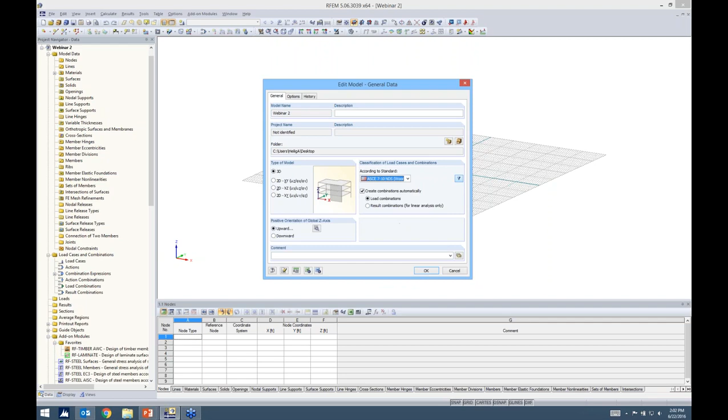When you launch RFEM, this is the dialog box that you'll receive, and you simply need to give your model a name and define the type of model, 3D, with the orientation of the z-axis upward. For our load combinations, we have ASCE 7 for 2010, the NDS wood load combinations. I check the checkbox to create these automatically, then we simply click OK.

Some of you are familiar with RFEM, but for those who aren't, this essentially is the program. We have the tables for data input as well as our results down here at the bottom. We have our project navigator over here on the left, which can also be used for data input. We have our display tab down here, which basically controls everything in our view window.

We have views, which we'll be using today, and then once we run our results, we should get another tab down here that says results. And then, of course, we have all of our toolbars at the top for our modeling purposes as well.

So we want to begin today with our walls, and typically with walls we would want to go ahead and model them in this vertical direction. What I find easiest is to use line elements to begin with, and up here we just choose new line in the toolbar, and you'll hear me say this quite often. We have a lot of AutoCAD-like features, which I think is one of the more powerful capabilities in RFEM.

Not a lot of time will be spent trying to create very complex geometries because we have all these capabilities within the program itself, such as splines, polylines, arcs. So for line options, we have the typical straight line, but we can of course choose any one of these. For our application, we'll just go ahead with a single straight line.

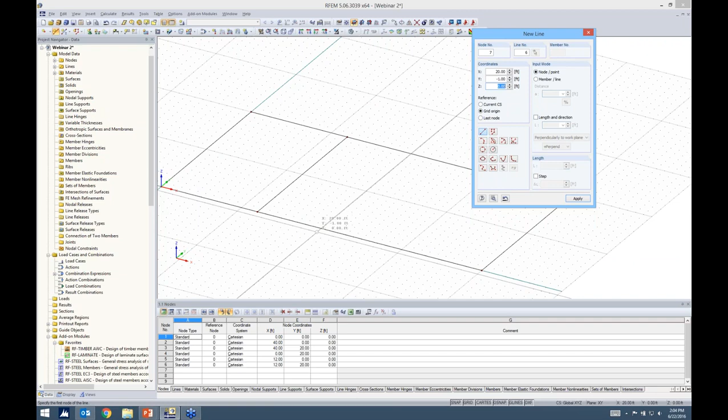Now all I'm doing is just using my drawing grid to draw a 40 by 20 outline of my building here. You'll notice that I just snapped to the different points, and I'm going to add an intermediate wall, maybe right here at 12, and one more at 20. So we have nothing more than just these 1D line elements here.

What I can do is just select them, right click, and under line I can go ahead and extrude the line into the surface. Something to note here, these are going to be cross-laminated timber panels. So cross-laminated timber is not available in RFEM. In order to define all of those different layers and properties, we have to use our RF-LAMINATE module, which we'll be spending some time in a little bit later today.

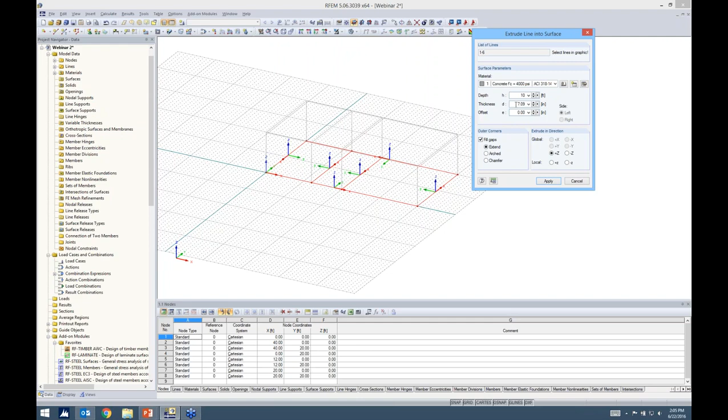So it's worth noting that the material here for our panels doesn't matter. We can just choose something very general, such as concrete or steel, because all of this is going to be overwritten later by the add-on module RF-LAMINATE. So for now, concrete is fine. I want a height of 10 feet. The thickness doesn't matter either, that will be overwritten as well. So I hit apply, and now we can see that our walls are quickly generated.

Maybe we want to add some openings in these walls, and for this I'm going to go ahead and change my work plane. You'll notice that the work plane is just on this front wall of this structure. Work planes are important because when you continue modeling, the work plane confines where you're exactly drawing your elements.

So I don't have to worry about drawing clear out in space, or accidentally drawing on the back wall—I'll be drawing where this work plane is set. As far as openings, our other toolbar has all the different opening options. We have the typical rectangular opening, but also many other options. This can be super powerful for finite element modeling, or if you have a structure with odd geometry for openings in a slab or wall—you can see ellipses, polygons, anything you can think of.

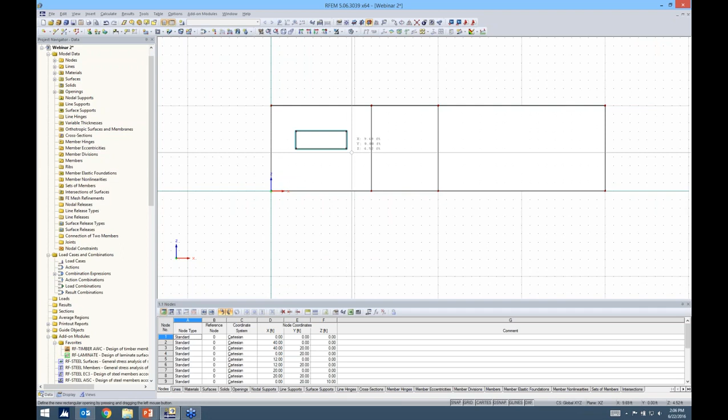For us, we'll stick with a rectangular opening, and I'm just going to draw some windows here, nothing too complex. Maybe we want a door opening here, and lastly a window over here.

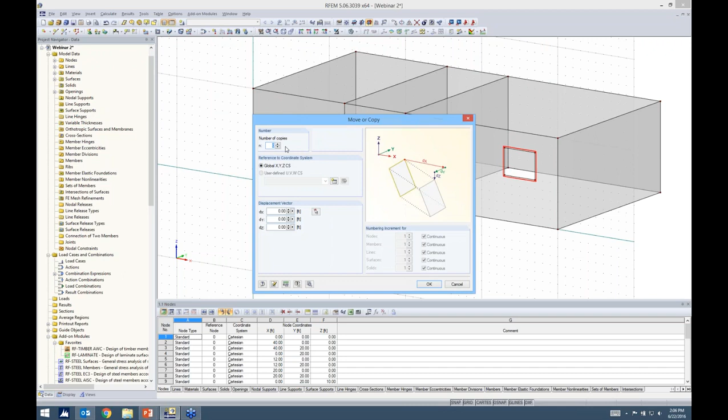Now, as far as the windows for the back wall, I can hold down my control key to select these openings. I'm going to use my move tool and create one copy, moving it back 20 feet in the Y direction. You'll notice I'm going through modeling maybe a little quick.

We have plenty of other webinars that cover more basic modeling. I really want to get to the CLT and timber design, so that's why it may seem a little quick in terms of all the modeling behavior.

Now that we have this defined, I'm going to change my line grid for my floors by simply changing the work plane again, and you'll see how quickly I can define my different origins—now I'm at the top of the structure.

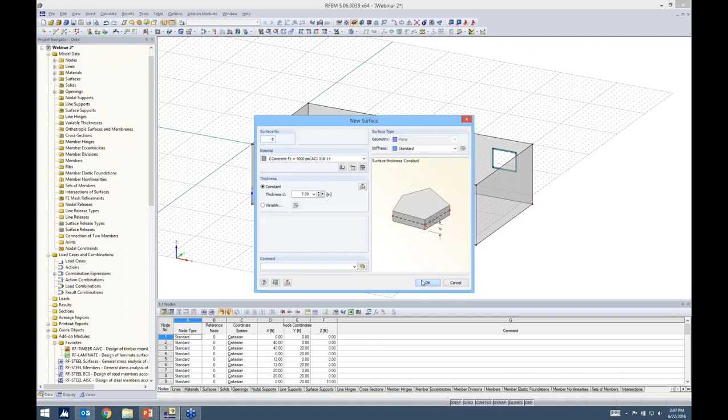We have this other button up here, and this lets me select all of the model. Instead of a single continuous line that previously existed, these are now broken up where the wall panels intersect. Now I can create a surface by selecting my boundary lines—the material and thickness don't matter, this is CLT that I'll override later. So for my floor elements, I just select the boundary lines, and do the same for the second diaphragm. Now we have our first floor.

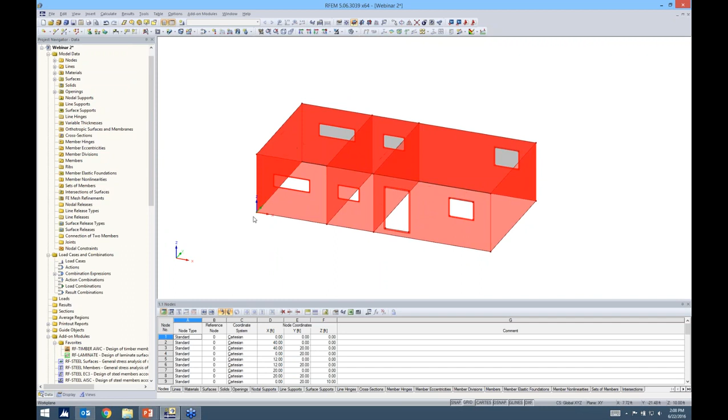Now we want to create our second floor. That's as simple as selecting our walls—I was careful not to select the floor panels—holding down control, and dragging and dropping. This is a very useful feature in the program to really save time on modeling.

Maybe I don't want this opening up here at the top. I can just select it and delete it.

Now we want to create a pitch in the roof. For this, I'm going to turn my rendering off to only a wireframe model. This way I can select all of these lines at the roof level, right click, and divide the line by n intermediate nodes, placing one intermediate node at all of these lines.

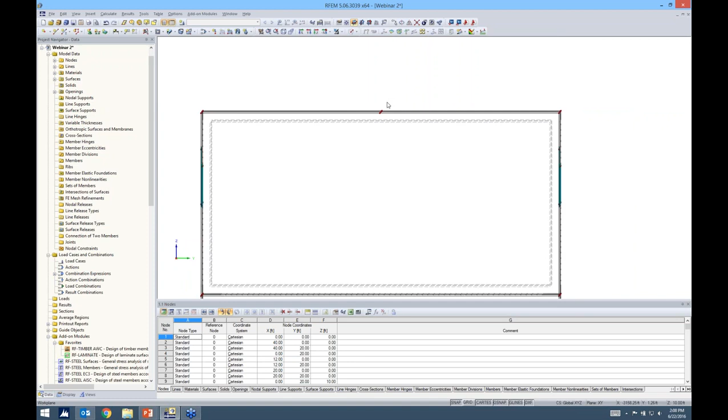Pretty simple. Now I want to highlight only these nodes and use our move and copy tool. This time, instead of creating a copy, I'm going to move these particular nodes in the positive Z direction 3 feet. So now you'll see that we have a pitch in the roof.

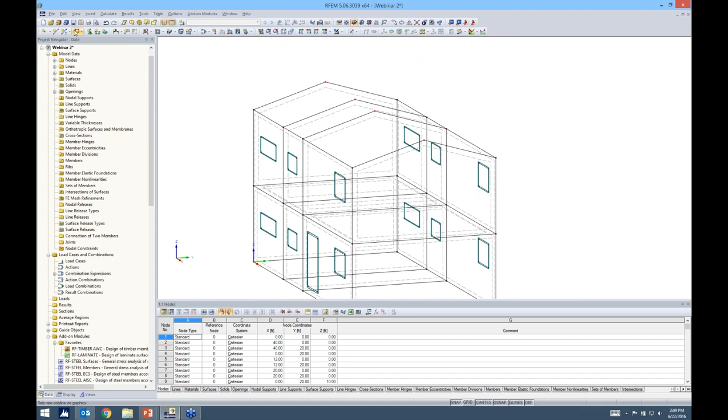Fairly straightforward. So now we want to draw our timber members. We click on New Single Member, and you'll see that the member type is considered a beam. There are several other options, but for this type of application, we just want a typical beam member. We want to create a new cross-section, and up pops our cross-section library—for this, I want to choose standardized timber.

Then this dialog box will pop up for all of the different standardized timber sections. We can further filter according to AWC. We also have CSA in here, depending on which type you're exactly looking for.

You can also go ahead and choose a favorites group. I created this favorites group, USA, and basically just added in a couple shapes that I'm using for today's webinar. Rather than sifting through all of those different shapes, you can create as many favorite groups as you like and add or delete any of these shapes here.

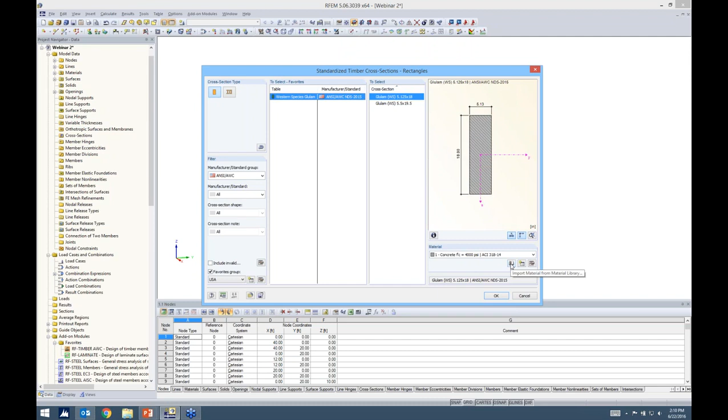Concrete won't suffice for this timber member, so we need to go ahead and define our timber material. For this, I go into my material catalog. Of course, we want the timber filter initially, and then you'll notice that we have all of these further filters. For our application today, we want to be in North America, because North America contains the AWC materials and the CSA materials. Even for AWC, it's quite an extensive list. You do have the option to search here.

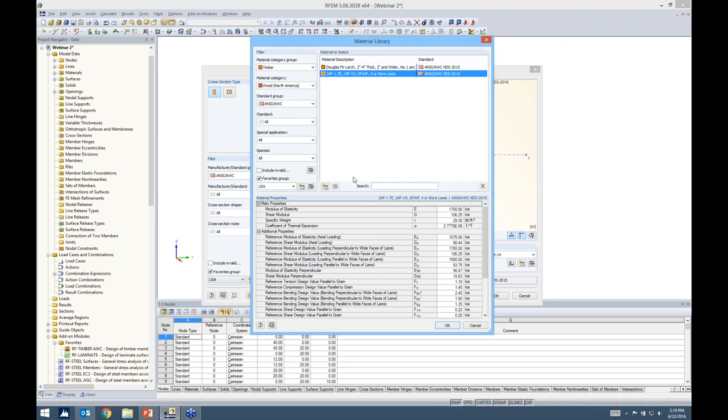Again, though, I added it to my favorites group. So for this particular member, I'll use a 24F-1.7E for my material. All of the material properties are shown right here, so very easy to access.

Now it looks like we have something more like a timber material. I can click on this info about cross-section, and get all my cross-sectional properties just at the click of a button.

Now, one thing to note here: if I go ahead and click on my edit material again and look at my particular material model, this list isn't really as extensive, because I only have a 1D element chosen right here. But I'm going to jump back to the PowerPoint.

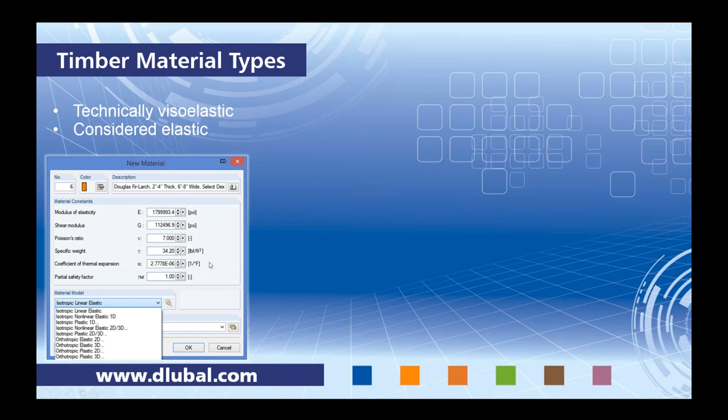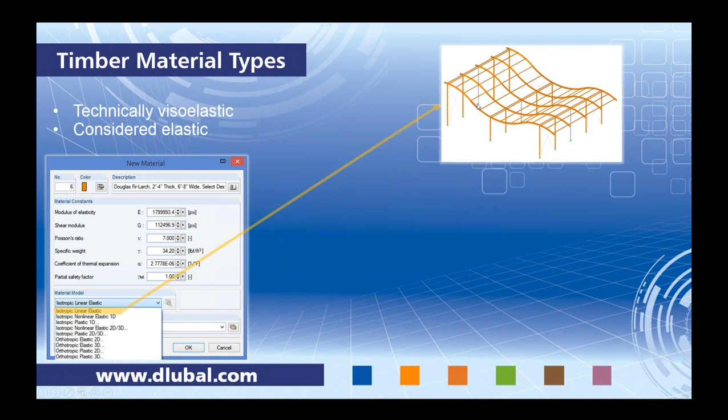However, I want to differentiate the different material models for our different elements. For 1D member types, such as we're modeling right now, we'll use isotropic linear elastic. For 2D surface elements, we're using orthotropic elastic 2D. Most of us know what orthotropic is - it's just where our material properties are different in the X versus the Y direction for each surface element. And lastly, we have the solid model, and for that same concept, except now we have 3 directions for a solid.

Okay, back in RFEM, if I go ahead and click OK - and if you've used RFEM before to model timber, you'll notice this error message that pops up every time. This error message is saying you must have incorrectly defined your material.

Poisson's ratio is greater than 0.5. The calculation is possible, but only E and G are applied. Is this okay? I really want to explain what's going on here, because some of us may just click yes and not really know the logic behind why this program's throwing up the error.

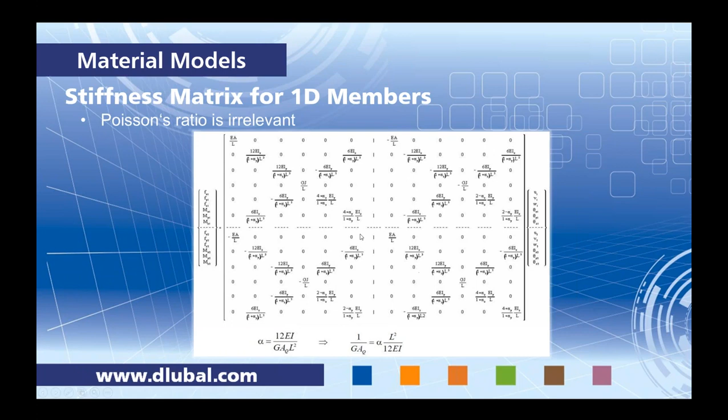The reason why is because if we look at the stiffness matrix for a 1D member, Poisson's ratio is irrelevant. You won't see Poisson's ratio referred to anywhere within this stiffness matrix. So the fact that only E and G are applied, which obviously is present throughout this matrix, that's fine. Not using Poisson's ratio is not a big deal.

For orthotropic elastic materials for 2D surfaces, it's slightly different. For the modulus of elasticity and shear modulus, they are related with these equations listed here. Nothing too complex. Now, E, G, and Poisson's ratio are fully independent, unlike isotropic materials.

Back a couple slides when I showed you this equation E over 2G minus 1, well, this is actually not applicable for orthotropic 2D surfaces. We do have a relationship with Poisson's ratio and the modulus of elasticity, and there are equations to approximate Poisson's ratio, but timber cut down on the East Coast and the exact same species on the West Coast will have a different Poisson's ratio.

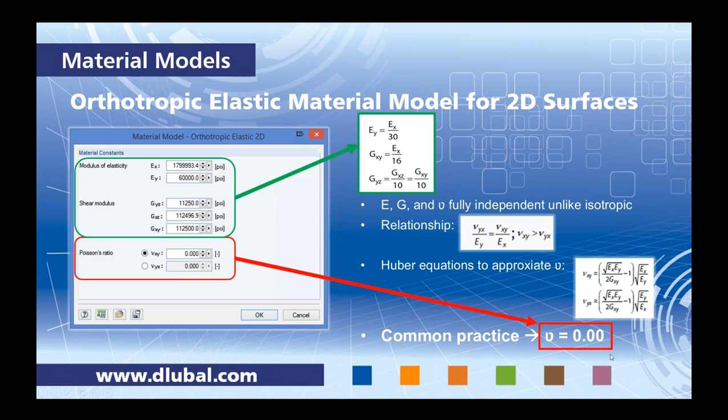So there's really no way to get that exact number. So therefore, it's common practice just to use Poisson's ratio equal to 0. The program is set up to default to 0, so that's why we use 0.

GXY and GXZ, these are equal. This makes sense. They're running parallel to the grain. No matter which way I flip this member, I should have the same shear modulus. But when we're looking at perpendicular to the grain, it also makes sense that we should have less shear modulus for GYZ, which is how this equation relates the three.

Okay, so jumping back into RFEM, here's this error. We can go ahead and click yes. So that's kind of where that's coming from, and then I can click OK again.

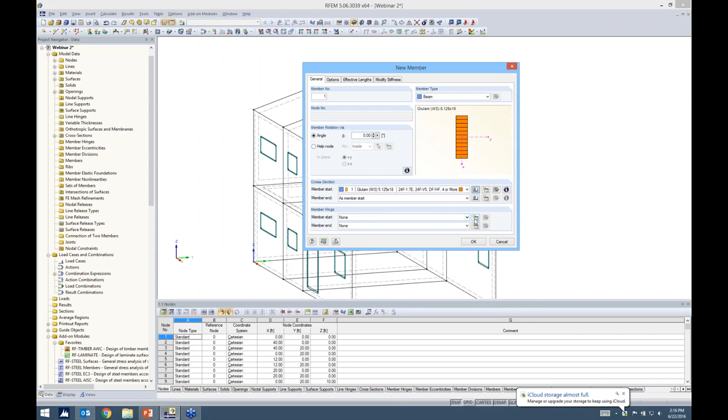Something to also note, we want to go ahead and apply some member hinges to this end. I want to create a new member hinge, and the default here is to create a pinned release to release rotation in the local Y and Z axes. There's a nice picture here if you don't understand exactly how the local axes are laid out.

Also, you have the ability to really get into nonlinearities if you choose, such as partial activity. You can define your own diagram, plastic hinges, but you'll notice everything is pretty well hidden if you just want to keep it as a typical pinned or fixed release. So these nonlinearities are possible, but it's not overwhelming that you have to sift through all this information just to get your typical release here.

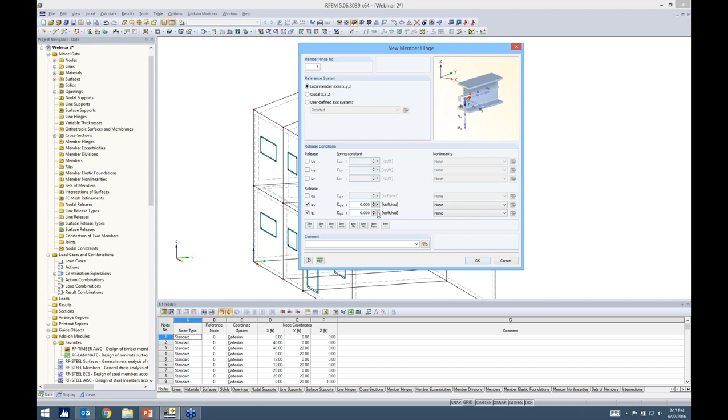So for the member start and member end, I'll use a pinned release. And here I'm just going to go ahead and model this member between each of the walls. The reason why I'm doing it between each of the walls is I want the pinned connection at each wall. I can go ahead and choose the rendered view again, and we can see how that timber member is applied to the roof.

Now, the next thing that we want to do is to go ahead and draw in our rafters, and we'll go ahead and create a new member again with a new cross section, this time a parametric timber, and all I need to do is type in 4x8. Now, I don't want this same material, so I'll go into my material library. Under my favorites group, I already have Douglas fir larch put in there. I click OK, I click OK again.

Now to address the member hinges. I think where the first rafter joins this larger ridge member, I want a typical pinned release. That's fine. However, for the member end, where we're framing into this CLT wall, I'm going to define a scissor release. And what exactly is a scissor release?

Well, a scissor release is where we have 4 members framing in together here at this single node. However, the continuous members, such as 1 and 2, will go ahead and transfer moment between each other. Same with 3 and 4, but we don't want to transfer moment to the perpendicular member. We only want to transfer axial and shear forces.

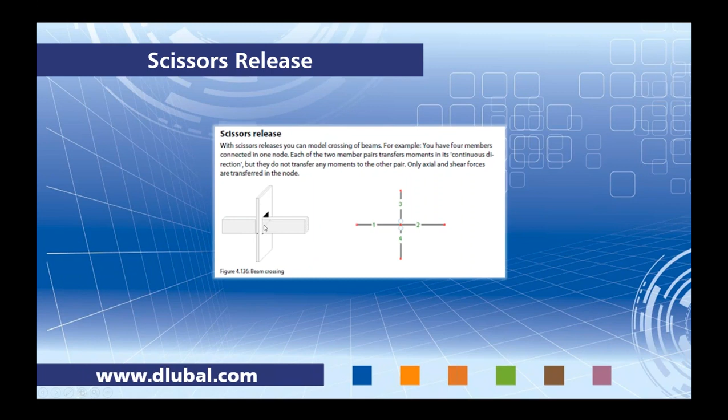So I think that this is best illustrated, and by the way, this was just taken from our manual. This is best illustrated with a beam or our rafter passing through the wall. You can see that moments will certainly be transferred for the items considered individually, but considered together, we don't want to transfer a moment to each other.

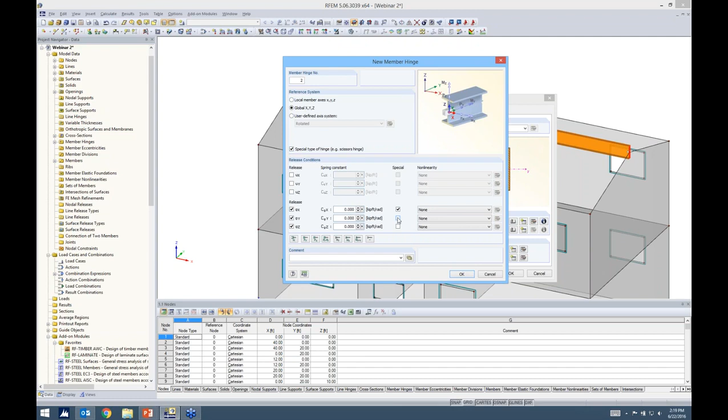So we will go ahead and go back into the program, and under the member hinge, we'll create a new member hinge. And here, instead of the local X, Y, and Z axes, I'm going to create a global X, Y, and Z. Then you'll notice that this option pops up here for a special type of hinge. And with this, I can now go ahead and check this checkbox for special and release all rotations.

If I click OK, you'll notice that the program denotes this as a little bit different from a typical release by putting an S on it for special. So I click OK, and then I just need to go ahead and draw in my first rafter.

The other thing I'm going to do is use the drag and drop by holding down my control key to extend the member. I want to adjust my member releases here for the second one.

I also want a scissor release at this location, so my member start, because I've already defined it, is available in this drop-down. Member end doesn't matter, and the reason why is because I'm going to divide this member, and I'm going to divide it by a certain distance.

You'll also notice when I'm in this divide dialog box, it's nice because I don't have to guess what's the member start and the member end. The program throws up this little black arrow here for all members showing you what's the start and the end, or the I and the J ends.

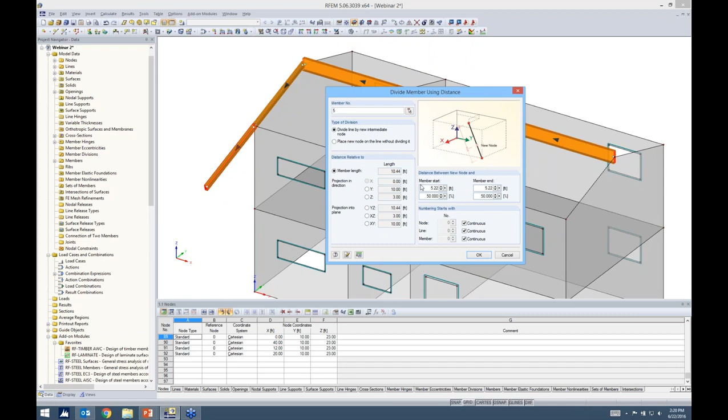So the member start, I'm going to go ahead and divide it 2 feet from the member start. I click OK, and now I have 2 separate members. And I'm just going to go ahead and delete these.

As far as the scissor hinge, I do need to move it over slightly because I'm at this intersection of 2 walls, and the program will give me an error just because it's a very odd connection to be at this particular intersection. So I'm just going to select both of them by holding down my control key.

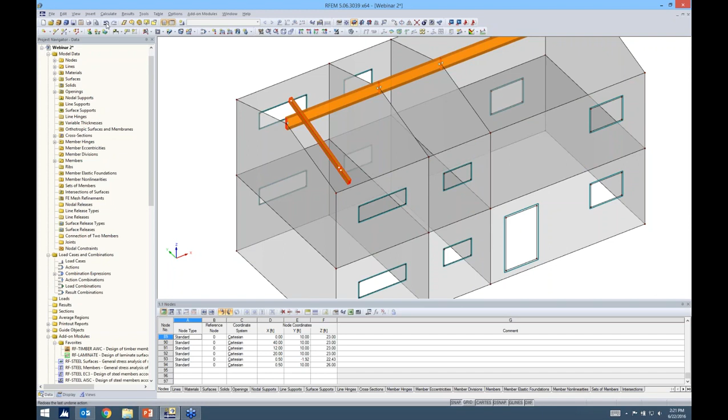I'm going to use my move tool again, and in the X direction, 0.5 feet. Oh, sorry, let me undo that. I also had the Z direction defined as 3, so we'll change that back to 0.

As far as the rest of the members, it's easy enough using our move and copy tool. I'm going to create 13 copies at 3 feet on center. I click OK. All the hinges, special types of hinges are there. My spacing is correct, so everything looks good.

Now I need to do the exact same thing for the other side. I could go through that whole process again, or I really want to utilize the tools in RFEM. So under this Views tab down here, you'll see all of these default options, and this is basically just to select different objects in the view window here.

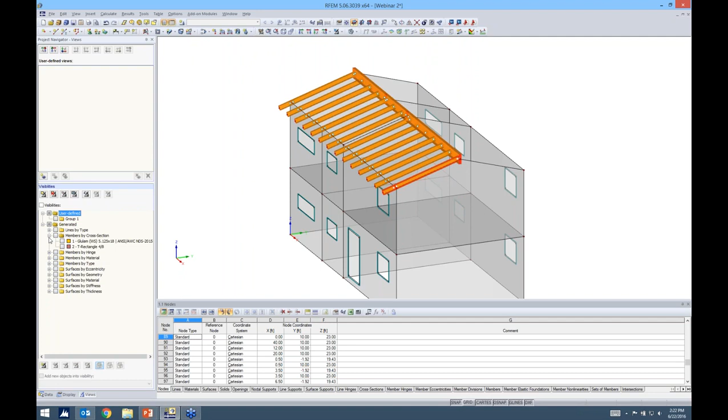For example, there's an option here, members by cross-section, so all my different members by the different cross-sections would be listed here. For me, I just want to select my 4x8s. You'll notice that I can't really select anything else in the model, which is exactly what I wanted.

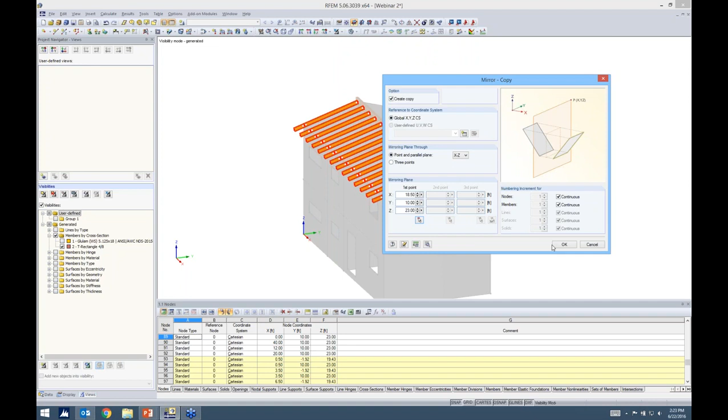Now I can highlight all of these, and we have the mirror tool, just like in AutoCAD. I'm going to create a copy, and it's asking me which plane do I want to mirror through. I want to mirror through the XZ plane, and then I just simply need to choose a point at which it will be doing the mirroring. So I choose any one of these top points. I click OK, and now I have my roof.

So again, a lot of features to quickly model in here. Okay, lastly for this, we want to go ahead and, one more thing. Let me turn this into wire view.

And if I zoom in and I just select this floor panel here and I choose visibility by selected objects, I'm really only looking at this single floor panel. Well, this floor panel is pretty long, and maybe I want to add in some type of beam along here.

That's fairly easy to do, but I really want to drop it down so the eccentricity is included for the surface thickness as well as half the beam depth.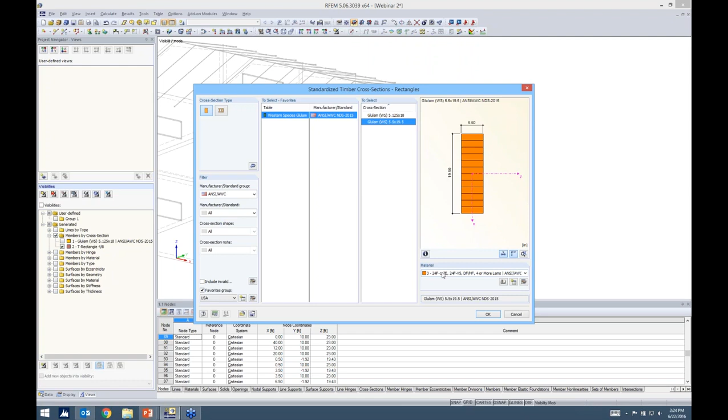And with that, I can go ahead and create a new member, just like what we've seen before, create a new cross-section. I'll go into standardized timber here, and I'm going to choose my other Glulam that was in my favorites list. Materials already defined, so that's perfectly okay to leave it the same as the other one. As far as my member end releases, I just want a typical pinned release.

Now, there's another option here called options. Under this options tab, we have member eccentricity. If I go ahead and create a new member eccentricity, you'll see that I can either choose an eccentricity by defining the length, either at the I or the J end, or I can do a relative offset.

This is really user-friendly. I want to note, though, that when you're first in this, trying to apply these different eccentricities, it could take a few tries before you get exactly what you want because the local axis is very important.

Just because I've been in RFEM enough, I know that my local axes are opposite of what is shown here. So realistically, instead of choosing the top of the beam, I would choose the bottom, because I know my local axes here will be modeled with the local z-axis up.

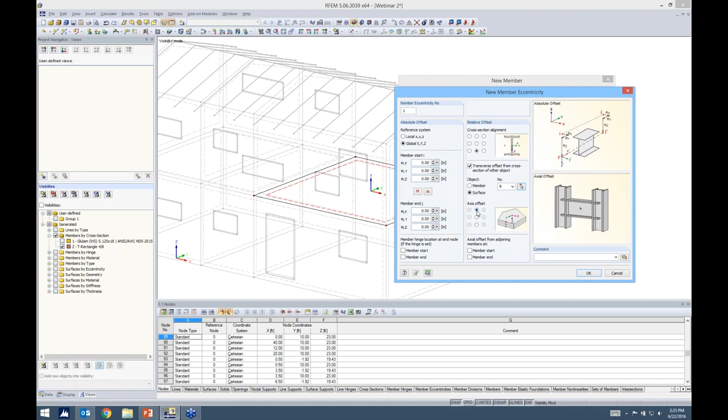Now it's asking what you want to offset it by. I can choose either a member or a surface. So if I choose this surface and graphically select the surface I have selected here, again, I know my local axes are opposite here, so I actually want to select the bottom. Then I click OK.

Then I can go ahead and click OK again, and now I can model this particular beam. You'll notice too that I don't need to model in extra nodes because of the CAD-like capabilities. My centerline snap point pops up, and I can choose the other centerline.

You'll also see a perpendicular line, so it's kind of nice in the sense that I don't really need to worry about drawing in an extra node there. I can go ahead and render it to show exactly how this beam was dropped down.

You can see the rigid links that were created, and these rigid links were created based on half the depth of the beam as well as the surface thickness.

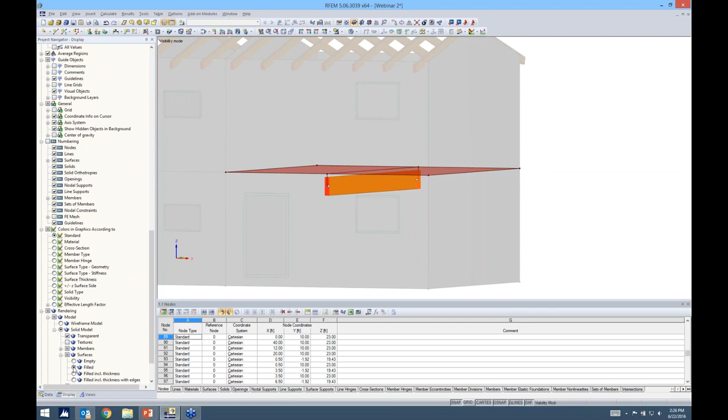I can also go into my display down here in my project navigator, which controls everything we're seeing here. I want to show you that you can render these surfaces as filled so you can really see how this beam is dropped below that particular panel.

Okay, I will go ahead and cancel my visibility mode here. And the last thing we want to do is go ahead and add some line supports here.

Line supports can be applied, let's say, to the bottom of these walls. Default, hinged and rigid, pretty self-explanatory.

If I create a new support, again just like member end releases, you really have the ability to dive into these nonlinearities. If you have friction, partial activity, or sliding, all of these are possible with these support reactions. So we're not going to get into this today.

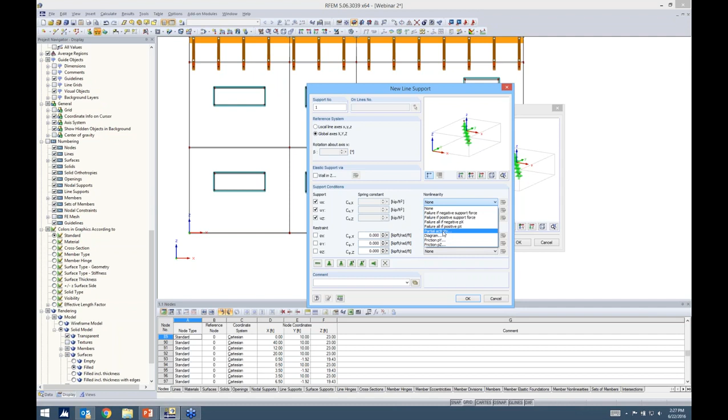We'll keep it as a linear support, but just know that it is an option. So for us, we'll keep it as a typical hinged support, and we'll apply it to all of the bottom of the structure. Okay, so our modeling is essentially complete for the structure.

Now I want to go ahead and quickly add in some loads. For this, I'm going to create some new load cases, which just opens up our load cases and combinations dialog box.

So the first load case will be dead, and we want to keep the action category as dead, and you'll notice self-weight is activated for it. I'll create another one, called live, and assign it to live load.

We need to pay careful attention to the action category, because this is how the program assigns these load cases to the ASCE load combinations. If you incorrectly define an action category, you're going to get the wrong load factor.

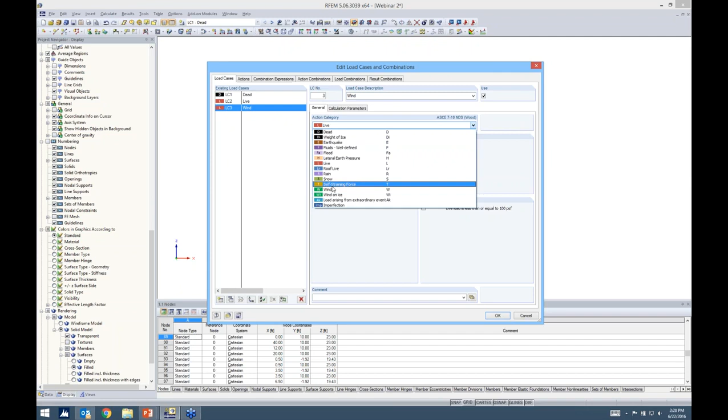So keep in mind that these are important when you are assigning your load cases. We'll go ahead and assign wind here, assign it to wind, and lastly we'll assign snow to snow.

Okay, so I can click OK out of here, and you'll notice that when I'm looking at my drop-down box now, which was previously empty, I now have all of my load cases, and the program automatically created all of my load combinations according to ASD and LRFD.

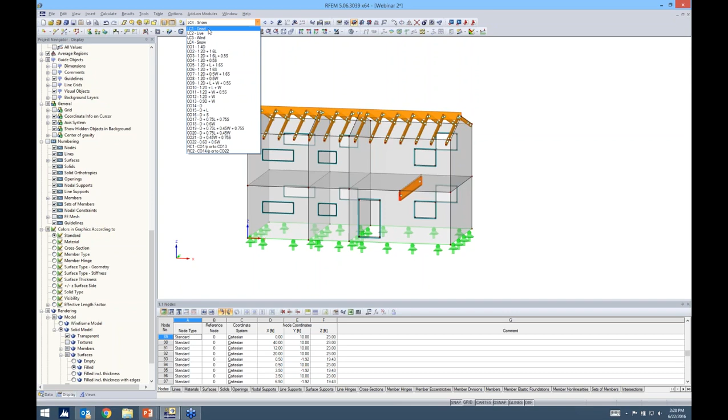For now, when you're applying loads, you want to make sure that this is set on the correct load case that you want the loads applied to.

So I think what's easiest here is to go ahead and highlight our floors and make this visibility based on the selected objects. Then I can go ahead and just quickly add surface loads to my first floor.

I just go to new surface load, and you'll notice here that you have options to really get into depth for your surface loads. For us, we're just going to keep it as a typical force uniform. As I scroll through these different load directions, this little picture updates, which is nice, so you can see exactly how you're applying it in your model.

For us, we will just go ahead and stick with the ZL direction, in the negative direction, with our magnitude at -0.1. I click OK, and it's as easy as clicking on the surfaces.

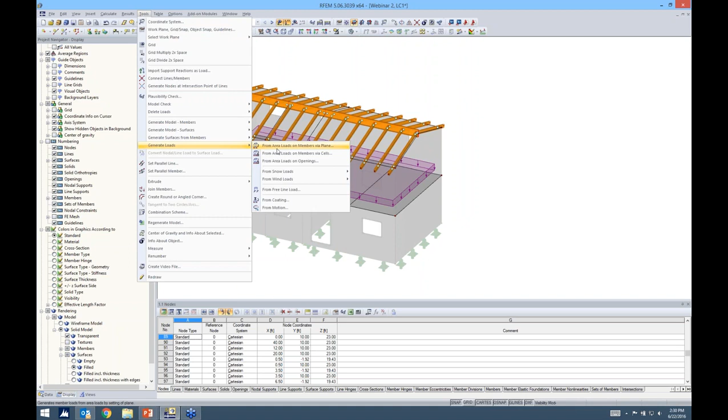Now, for my members up at the top, I want to use our tools, generate loads from area loads on members via plane. Again, we can scroll through these different options. I'm going to stick with the typical ZL. What this is going to do is apply an area load, and it will actually distribute the line loads based on tributary area to all the different members. Now my magnitude will be -0.05.

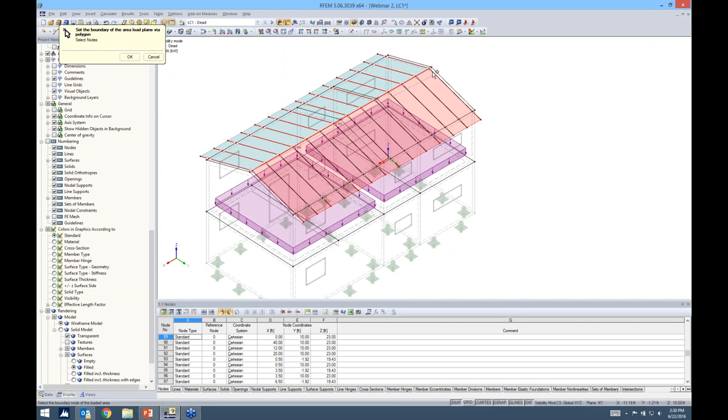The program's asking me, okay, where should I apply it? I need to give it some area loads. I can change this back to my wireframe, and I'm going to select first one side of the structure, and then go ahead and select the other side as well. This will be taken into consideration when the program is applying this dead load to the roof members.

I can actually also, which I think is a nice feature, remove the influence from single members, or remove the influence from all members parallel to a certain member. So if I choose this option, maybe I don't want the dead load applied to my ridge member. I click OK, I click OK.

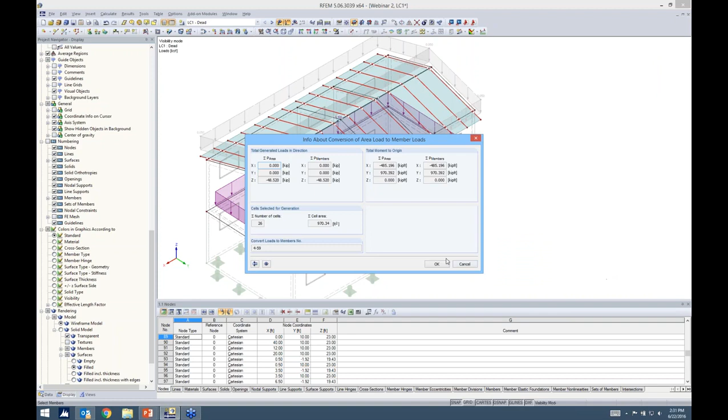Up pops some math, just showing you exactly how that was applied. I can also right-click and display it separately, so without solving, I can already see what these loads are on the member, which is nice. For a little bit of a cleaner look, we can keep it as a single load.

Now, quickly going through live load, same thing. We'll just apply a surface load in the ZL direction, but our magnitude will be a little bit less, and we can just go ahead and apply it to these two surfaces here.

Now, wind is obviously a little bit different. We could technically do some calculations according to ASCE, and just to let you know, we do have the ASCE load combination generator for wind loads in our internal version now, so I'm hoping that will be released fairly soon.

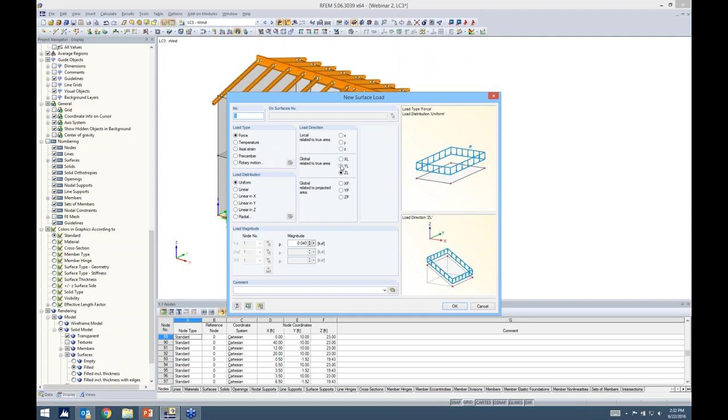For today's sake of time, I'm just going to apply a lateral surface load. I'm going to apply it in the Y direction with a magnitude of 0.03, and all I need to do is click on my surfaces. You'll notice my openings were taken into account.

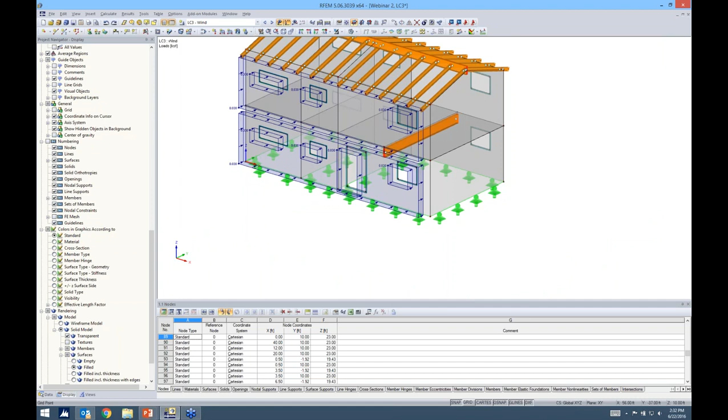Maybe later I decide, okay, well, I don't want this opening. If I delete it, the load is automatically filled in that particular opening. So everything is very automated in the program, which is nice for a lot of the changes.

Now, lastly, we have snow load, and for this, I do want to utilize our load generator from snow loads for a duopitch roof for ASCE.

For this application, I think this is nice because if you're used to snow loads according to ASCE, all of these factors will look very familiar. If by chance you're not sure on a factor, if you click this info button, these are all the tables taken directly from the code. So it's nice that you don't necessarily have to flip to the code in order to get some of these factors. The same with the ground snow load.

We actually incorporated this map here, and we can double click on, let's say, our structures in South Dakota, and it will automatically come up with our ground snow load.

The roof geometry needs to be defined, and one important thing to note here: you can't just click all over to create your roof geometry. You really do need to follow these same guidelines as what this little window is showing you. So with that, I can easily just go ahead and choose my roof geometry based on my rafters here.

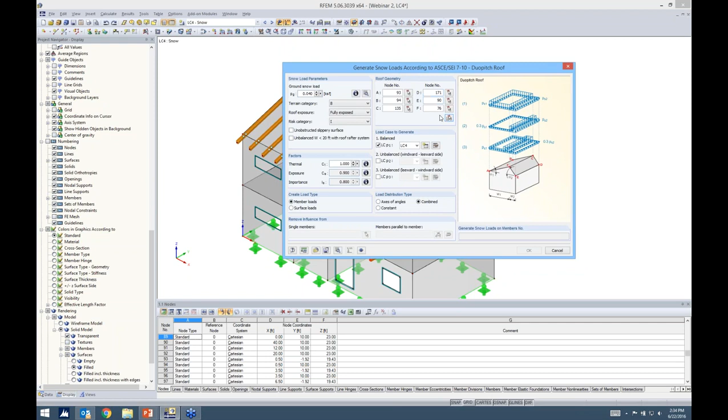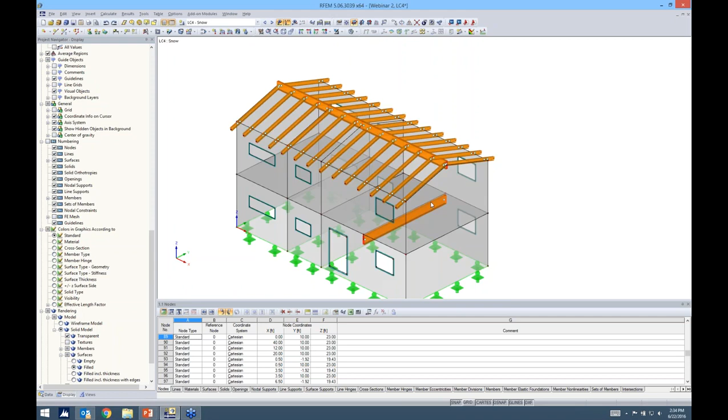The program jumps back into this. Now I'm just going to do a balanced load case, and you'll notice it automatically assigned it to our snow load. If I go ahead and click... sorry, for some reason I must have not selected my roof area load correctly. Let's try that over again. No, okay. Well, regardless, we can go ahead and apply the snow load here. If I go ahead and generate my loads again, I think there might have been an issue with the load combination generator in terms of my roof geometry. So for this, I can select my options again, but this time I'm going to turn it into wireframe to see if that works better. Maybe I was not selecting a proper node.

Okay, much better. Now that's a good point to make: if you don't correctly define this roof geometry, the OK button will be grayed out. The program is smart enough to know that something's slightly wrong, so you need to address something in your data here. For me, I must have clicked on the wrong node someplace. We can exclude the members parallel to member 1 again, and click OK.

Up pops my calculations for the ASCE, and then you can see here that, again, we can right-click and display separately, and we get a nice layout of how the load is being applied to all those different members. Okay, so now that we have all that, we can actually jump into the laminate module.

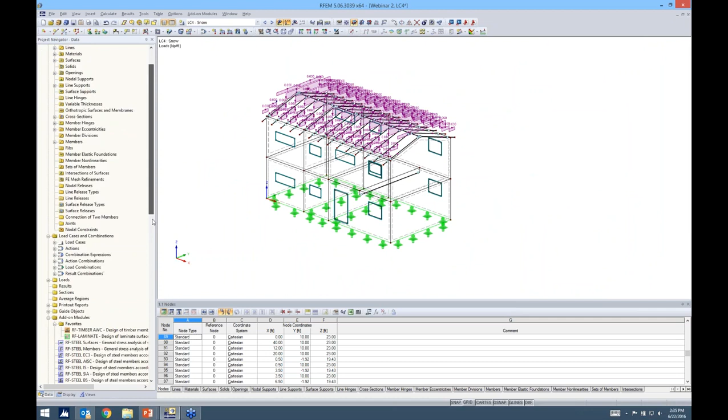So, RF laminate here. I want to go back to the PowerPoint to describe what we're doing in RF laminate. In this module, we're actually going to define the different layers of the CLT panel. Each layer is going to have its own properties, such as modulus of elasticity and shear modulus. And we'll go ahead and create a stiffness matrix for each layer.

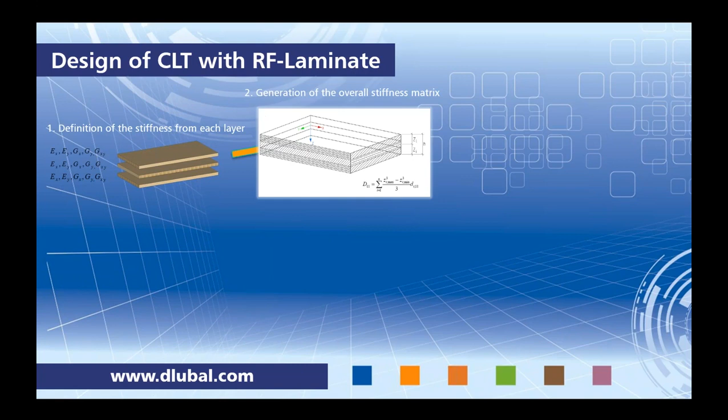Also in the program, it will go ahead and take each layer and then create an overall stiffness matrix. For example, this is an example from the D11 entry in the stiffness matrix based on all of the different layers. Then the program will export these correct stiffnesses back into RFEM.

So we no longer have those concrete panels and floor panels and such, but rather now we have the laminate panels with the correct stiffnesses. The program will go ahead and run all of our load combinations based on ASD or LRFD and get all of the internal forces. Then it takes those internal forces back into RF laminate.

It will distribute all of the stresses to each layer based on these differential equations here. And maybe more graphically, you can see the stress distribution throughout the depth of a cross-laminated timber panel. It would look something similar to this.

Then for each stress, we're actually going to go ahead and separate it into tension, compression, and bending components. Then we take those stresses and compare them to what the code is giving us for our limit stresses, and then we're going to get a code check. So essentially, that's how RF laminate is working within the program.

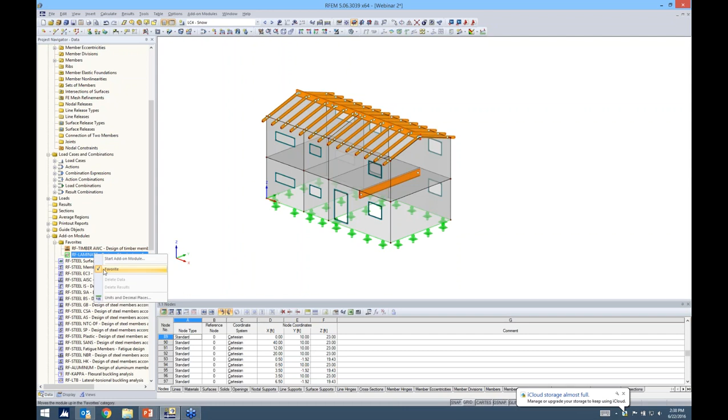So you can see here that I'll go back to my rendered view, and I have a multitude of add-on modules, but I added the ones I'm in most often. You can just right-click and check favorite to move it up to the top, which is nice.

So I'm launching RF laminate. When I say add-on module, this is the add-on module. It looks like another dialog box. So I don't have to remodel anything. I don't need to worry about linking data together. Everything is all within RFEM.

And the other thing for these add-on modules, you just want to work from top to bottom with the input data, which is given here on the left. So just work down this list. The first thing it's asking us is what surfaces do we want to design. I can check this checkbox all, so all surfaces are now selected in there.

Now for standard, we want to choose the NDS-2015. You'll notice we have both ASD and LRFD. I'll go with ASD. Therefore, I want to select my ASD load combinations from ASCE. So here I can just select the ASD load combinations, and these are what I'm going to use for my design. Serviceability is if you want to go ahead and do a serviceability check in the program. And under the standard, you can set here your limiting deflections. Today, we're not going to do this, but just to note that that is there.

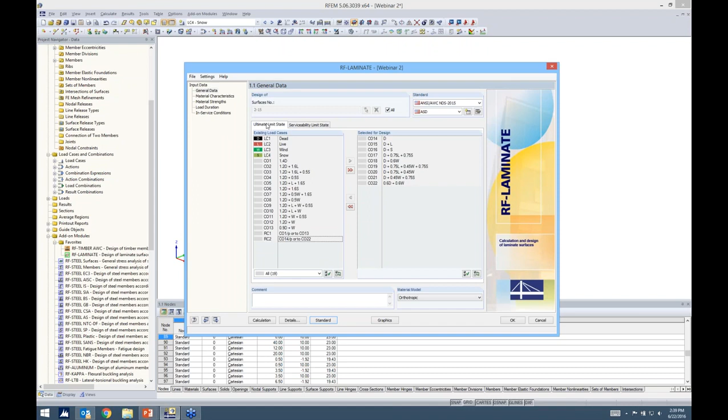Material characteristics. The first thing we want to do is define the first composition. Here I'm going to title this one walls. You can go into your material library for timber and add all the different particular material types, whatever you'd like. Give it a thickness and a direction.

But we also have this option, import layers from library. We're working on placing Structurlam products in here as well, so that should be available soon. For now we also have the PRG 320 CLT, with different types here for grades and a few different thicknesses.

For walls I'll go ahead and stick with 4 1/8 inch. Now you can see the thicknesses were automatically generated, as well as the direction of the different layers. You can see the materials listed, and I have a nice picture of how my materials are actually layered. It's going to ask me which surfaces I want to define, so all I need to do is select my walls. I click OK, and that's automatically done.

Now I'm going to create a new composition called floor. Same exact thing, we'll get this from our material library, but I'm just going to increase the thickness to 6 7/8.

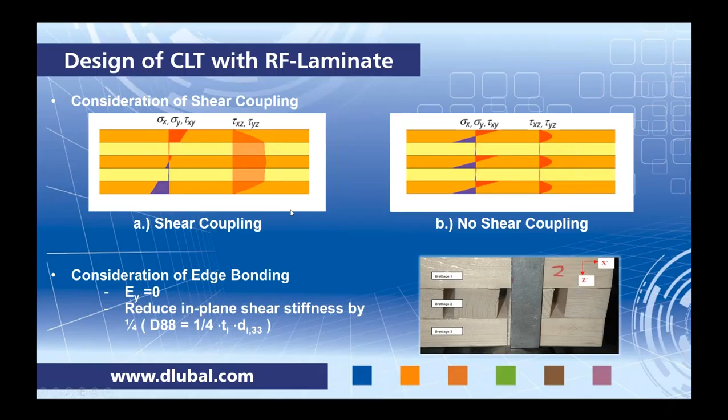Now for shear stiffness elements, this gets a little bit more complex. If we take a look at basically any type of rectangular section, we will always have a shear stiffness reduction, and for homogeneous rectangular sections this is set at 0.8. However, for CLT we obviously don't have a homogeneous section—we have all these different layers, so we can't really make this assumption here.

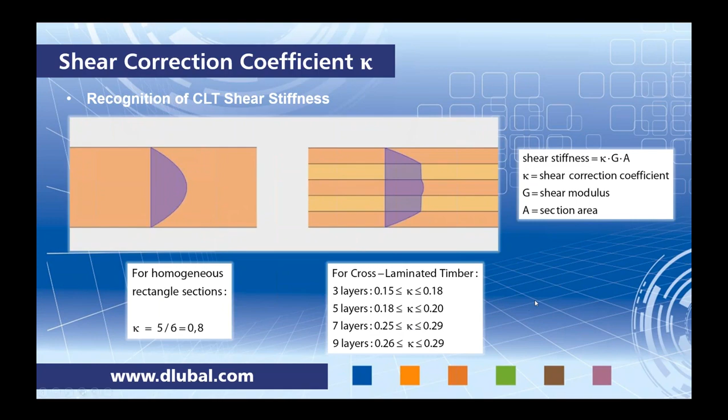For our shear stiffness we do need to somehow determine that, and it is the shear correction coefficient times G times A. Now, what is this κ, though, for cross-laminated timber? There are several suggestions from research to use these ranges for 3, 5, 7, 9 layers. The question is, what if we get to a point where we have 10 layers? Or what if we really want an exact coefficient within this range, but we don't know exactly where we fall? Well, the good news is that the program does this automatically.

Shear stiffness coefficient calculations according to general research and regulations—this is also in the CLT handbook for the USA—give this equation for the coefficient, and it's pretty complex, as you can see. When you're looking at RFEM, this is what RF-LAMINATE is doing in the program to determine the D44 and D55 entries in our stiffness matrix. It's actually going through all of these calculations to get these values.

If you're an engineer and have a lot of time on your hands and want to know what this coefficient is in the X and Y directions, you can take these values, D44 and D55, which we give in the program, and back calculate to find out what those shear coefficient reductions actually are.

Going back into the program, if I click on this info button, I can open up my stiffness matrix for this particular composition, and I can see D44 and D55 here. These are the values you would want to use. This is something you probably won't be changing unless you really know what you're doing, because the program is automatically calculating this for you. So keep that in mind when you're in these details options.

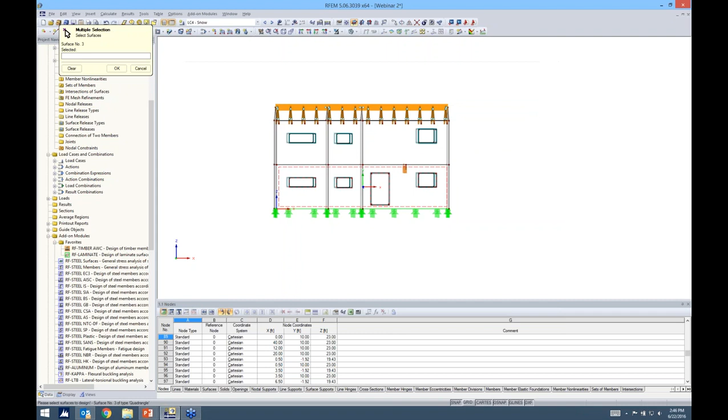If I click OK here, let me go back to my floor. I forgot to assign my surfaces to my floor. I click OK, and now I look at my model, and you'll notice they're now blue. I double click on them. They're not concrete anymore, they're now RF laminate.

In order to edit them, you need to go back into the laminate module. I can right click and display my local axes. Notice that all of my local axes are in the horizontal direction. This is not good. We want these strong layers oriented in the vertical direction to take those gravity loads.

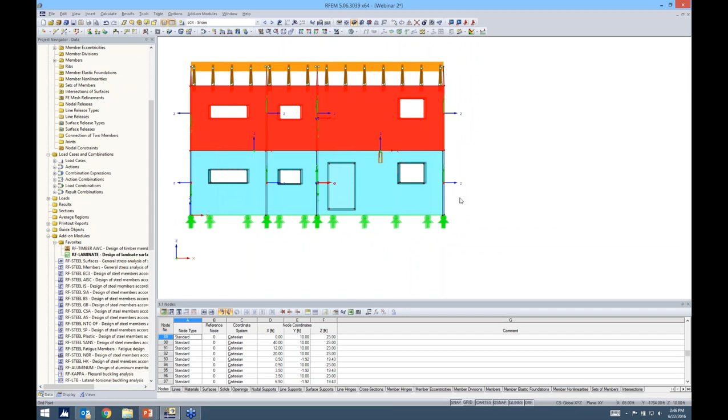I could sit here and change the orientation of all of these surfaces, but better yet, we have a quick feature in the program. If I select all of my wall panels, right click, and go to Surface Edit, there's an option called Axes. Under Axes, there's the option Axis, and I can set all of my local x-axes parallel to a line that I choose in the model. I'll choose this vertical line here and click OK. Now you'll notice all of my local axes are oriented in the vertical direction.

These ones come from the floor panels, so we don't need to worry about that. Again, this is a very important detail. Otherwise, you risk your results being inaccurate because you haven't oriented the direction of the layers correctly.

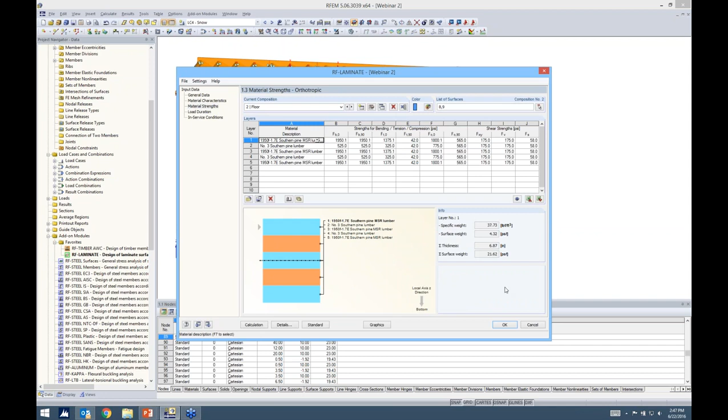Going back into RF laminate, we can continue moving down here. Actually, one more thing I forgot to do. Along with the orientation of the axes, you'll notice here that we have our walls framing into each other, and this is a rigid connection now. For cross-laminated timber, we probably won't have a rigid connection, almost guaranteed. So how do we address that? The answer is with line hinges in the program.

Every surface is composed of line elements on the outside. If I go to Insert, Model Data, and Line Hinges, I can assign a line hinge graphically. I need to give a new definition for a line hinge. With the screws and cross-laminated timber panels coming together, I'm probably not going to have any resistance for rotation about that joint, the local x-axis, so I'll leave this as released.

As far as translation along the joint, we'll probably have a little bit of slippage there, so I can define a spring stiffness coefficient of 40 kips per foot squared. I click OK. I'll use this option here that says select surfaces and automatically assign the lines, I think it's quickest. I click OK, and then I can select all of my walls, and you'll notice they're all listed here. I click OK, and now I have all of my line hinges assigned.

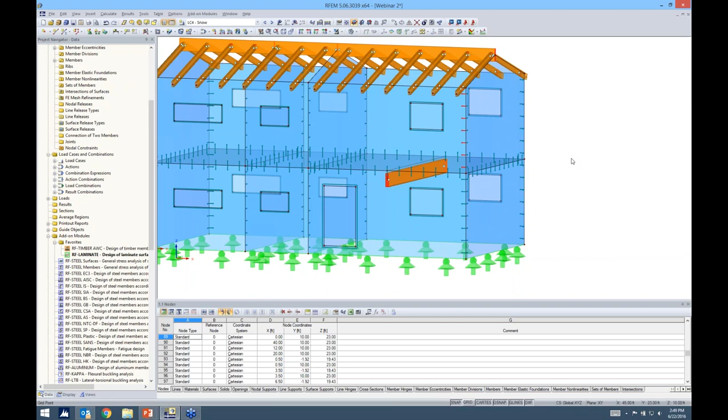I can see these line hinges, double click them, and edit them individually. So it's a nice feature to use that tool. However, there's one thing that we do need to clean up.

Just like the example where you have two members framing into each other, you cannot define both member ends as pinned. You'll get an instability. You need to have at least one rigid member, and the other member framing into it can be defined as pinned. But if you define them both, we get issues within the program.

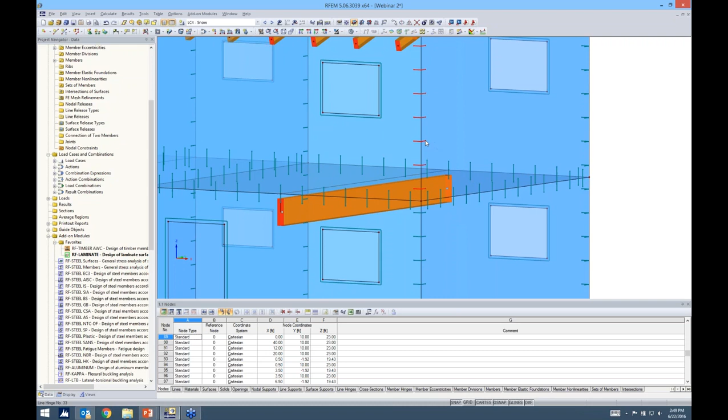Same for wall panels. We don't want to define two wall panels framing together both with a line hinge. We actually want to delete one of those. So I'm just going to hold down my control button, select them graphically, and click delete. Now let me do so on the other side, again holding down my control button, and click delete.

Now you might ask yourself, well, I see two line hinges here, but the reason why is because my floor panel is also framing in here, which doesn't have a line hinge. Therefore, we're stable for this particular intersection.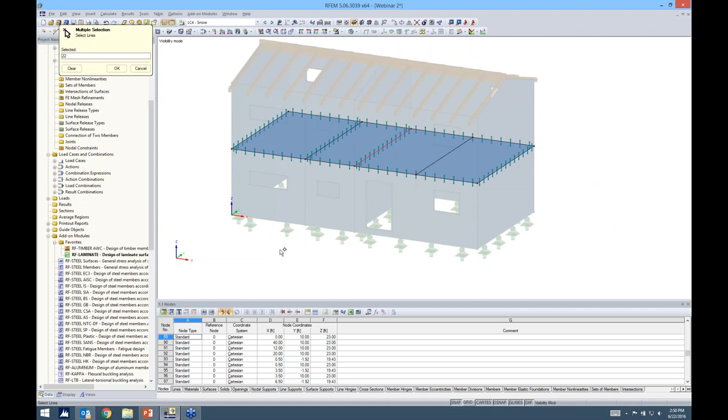The last thing I want to do is add one more line hinge to my floor. So if I create my visibility by selected objects, go to insert, model data, line hinges graphically, this time I'm going to use the same definition, but select the surface and then the line. So all I need to do is select the surface first, then the line, and click OK. You'll notice I have another line hinge, and I still have my one rigid surface framing in right here. Canceling this visibility mode, I'm going to jump back into RF-LAMINATE.

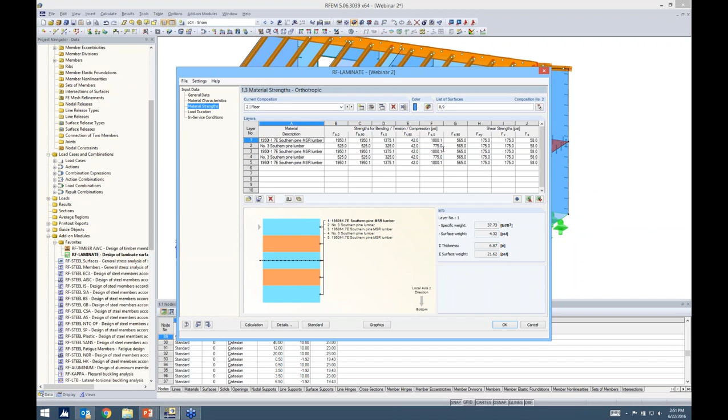And I just continue working down my list here. Material strengths looks very similar to material characteristics. It's just giving you your strengths for bending, tension, and compression based on what the code is telling us.

Load duration is just from our loads that we've already entered into RFEM, so everything's automatically linked here. Everything looks correct except for maybe wind — we want it more as 10 minutes for our load duration. Then the load combinations for ASD are automatically updated with the correct load factor.

In service conditions, is your panel dry or wet? All of ours will be dry. Then you can click on the standard button, and we get some other factors applicable to our strengths, our capacities. What's nice too is that we have all the references to the code here, so you never have to guess where, for example, load duration comes from in the code — we give the reference right here, so you can flip open to the code and take a look.

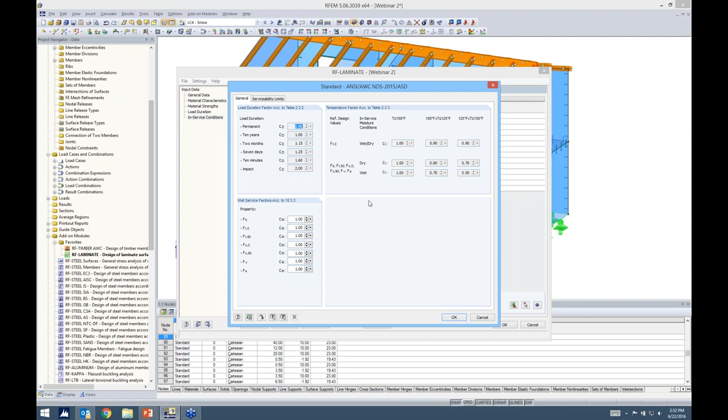With that said, I would go ahead and run the calculation now, but it takes a minute, so instead I'm just going to jump to a model that's already been solved. Let me pop open my RF-LAMINATE module. Like I said, this is the exact same model, I just have all my solution done right here. So you can see now my results have popped up.

My max stresses are given as a ratio by loading. We can see load combination 14, load combination 15, and so forth. You'll also notice there's a stress check for every single bending, tension, compression — every check in the code that requires shear will all be listed here. That's one awesome thing about RFEM: we don't just give you the controlling ratio, we give you every single one, so you can really understand what all the different load checks are.

As we scroll through these, you'll notice our diagram changing for all of them. But let's say I'm really only interested in the max load check — I can filter it according to the max, and it jumps to the load combinations that are controlling. You'll also notice that if we go back to the full list, regardless, we get our max ratio listed right here. We have a nice green smiley face, so we're below 1.0.

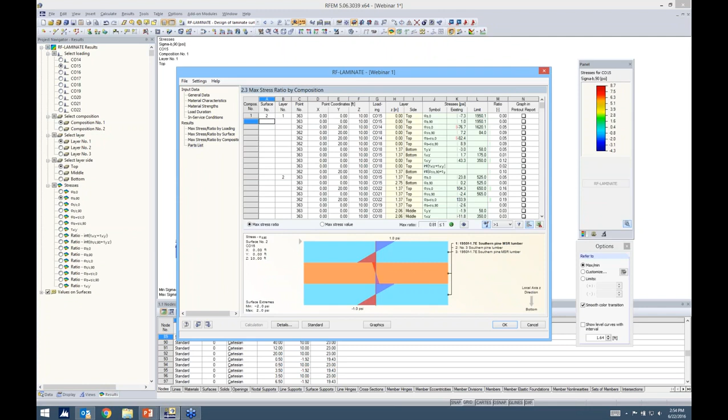These other options are basically just rearranging your results. This is according to surface, so now surface number 2 is listed here. Then we have composition, so our walls and our floor that we created. We also have our material takeoff here — engineers might be interested in this.

For their calculations and such, you can go ahead and put this report in there. So that is available in this module.

Now the other thing we can do is jump to our graphics, and you'll notice our results bar is here now, and we can actually view all of the different stresses. Although we had it in table form, maybe we want to see it graphically. So we have all of our stresses here that we can view. We have composition 1, which is our walls, and we can jump to composition 2, which is our floors. So very powerful in terms of the graphics as well.

And then we can even view our ratios as contour lines as well. You'll notice everything's blue because we're well below 1.0. If things were closer to failing, it would be closer to that red color.

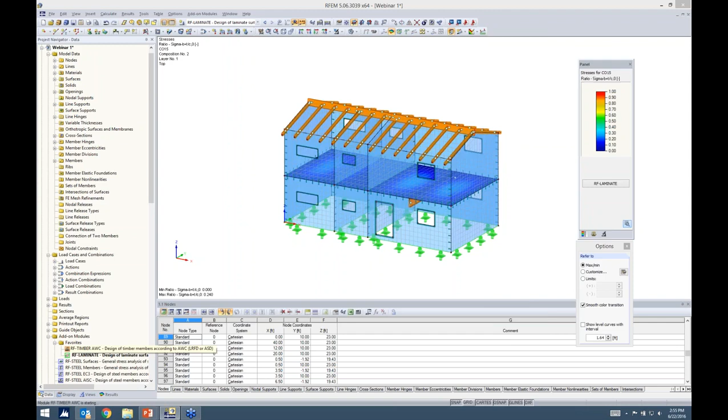Okay, with that said, I am going to jump into the Timber AWC module. Lucky for us, the module looks almost identical to the CLT module. This is pretty much the case for all of our add-on modules. So when you're opening up, whether it's dynamics, steel, or timber, all of them look very similar. So there's no need to learn all the different modules. It's going to be intuitive no matter which one you're in.

You can see here that we can choose design according to ASD or LRFD. I'll go ahead and choose ASD. I have my members just checked as all now. We can also do member sets so that we create design so that all the members are maybe optimized to the same size. So quite a few options there. This is similar to what's in our steel module, our concrete module.

Now for the actual design load combinations, because I'm running ASD, I want to choose my ASD load combinations for my design. Serviceability, same thing as CLT. If we wanted to take a look at some deflections, I guess it's not in there. If we want to take a look at some of our deflection limitations, we can go ahead and choose that for serviceability as well. Fire resistance, we also have the ability to do fire resistance design. Again, you would want to choose the applicable load combinations, and we would get a few more options for fire resistance.

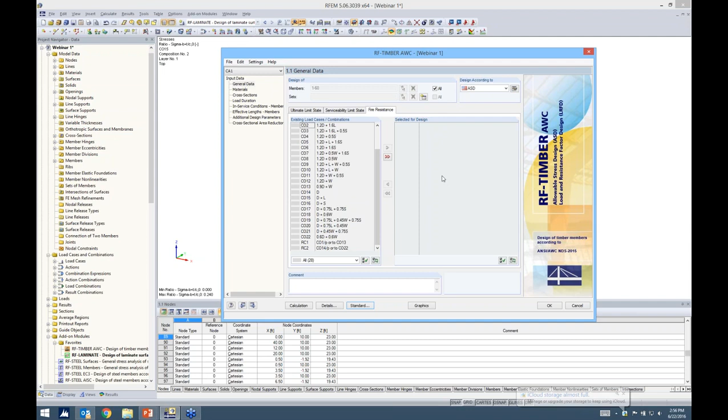Moving down the list to materials, you can see that concrete and steel are bright red. This makes sense. We can't design a concrete or steel beam in a timber add-on module, so those are not applicable. But you can see our timber materials are applicable. Laminate is not, because we need to use the laminate module. Cross sections, same thing—if we had steel or concrete in here, it would be red as well.

Now you can choose to optimize these members. Let's say we're well below 1, or maybe we're above 1—we can optimize. We get that question quite a bit, and that's certainly an option in these add-on modules. So you can optimize from the current row, which means it will choose one of the glulam Western species, or we can choose from our USA favorites list that I showed you before.

Load duration, this is the same thing as CLT. You can see here that our load cases were generated, and we already have the load duration factors correct in here. In service conditions, dry and wet, pretty self-explanatory here.

Effective lengths—this is if you want to consider buckling, if we want to consider lateral torsional buckling, we need to come up with our L effective. So the default is the full member length, but if there are some connections in the program that will actually give a shorter unbraced length, then we can go ahead and modify that here.

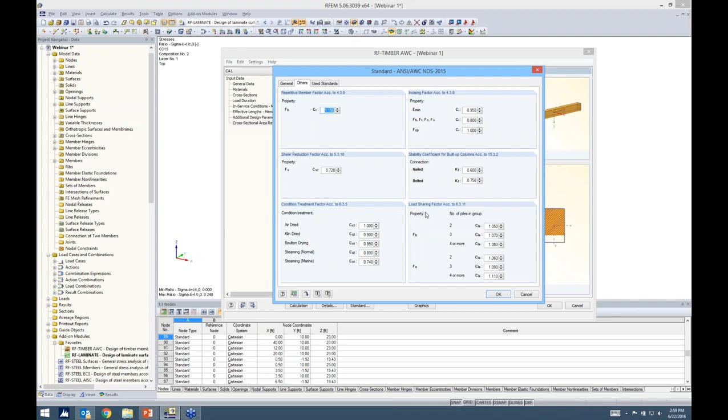If we click standard again, this gives us a lot more factors according to the NDS. We have all of the references here, and I think as far as our timber module, we're very strong in timber, so we offer a lot more factors in comparison to maybe some other competitors. Stability coefficients for built-up columns, shear reduction factors, load sharing—everything is pretty much available here.

So all I need to do is go ahead and click the calculation button, and you'll notice that I get my green smiley face. Again, just like CLT, I can filter if I want.

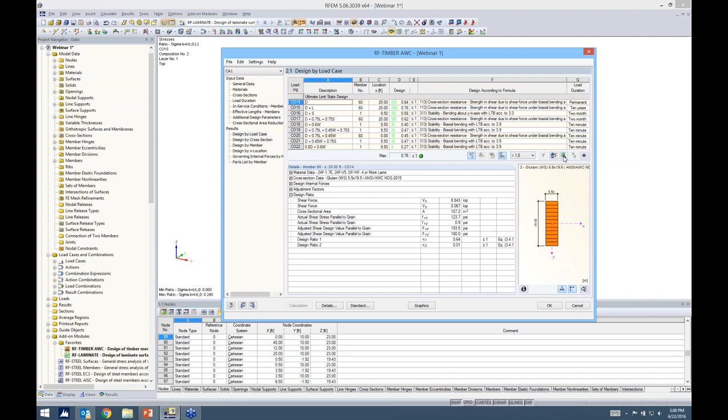Also keep in mind that throughout the program we have direct links to Excel, so you don't need to worry about copying and pasting—we can actually use this button to directly integrate with it. We get the design according to the cross section.

Maybe more interesting would be the design by the particular member. Again, so powerful in the program that we give every single check and not just the controlling ratio. And even better yet, we give every single variable that's used.

We list our cross-sectional data that's being used, our internal forces that we're comparing it to. So we get very little tech support asking, okay, I don't understand where these numbers came from, or maybe I don't understand why this code check is controlling over this one. Everything is listed here, so it's nice.

It's very thorough. And then, of course, the takeoff ratio and parts list by members located at the end as well. We can view everything graphically.

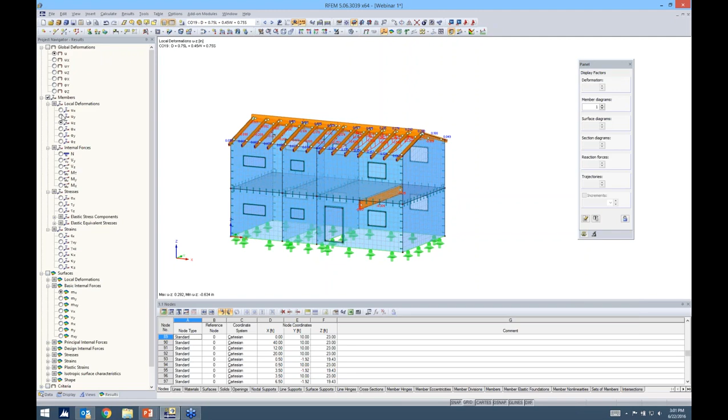You'll notice for the NDS, we don't really have anything too much to show here other than the design ratio. But you can always switch back to one of these load cases in RFEM to show your results for, let's say, these different members here.

We can show internal forces, which if I change this to wireframe, you'll be able to see it a little bit better. So quite a few options in terms of running a timber analysis.

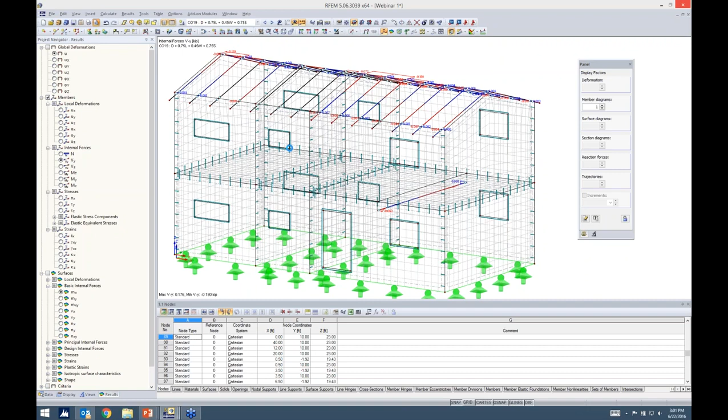Okay, one quick thing before we conclude the webinar. I just want to show you guys the printout report. Again, I think it's something that is quite powerful, especially in comparison to a lot of other printout reports that you have probably dealt with from other software competitors.

You'll notice that a completely separate application pops up, and here's our table of contents right here. Let's say we want maybe cross sections before line supports—we can just drag and drop, and the program will automatically update that.

But not only RFEM, we also have our add-on modules listed down here, RF-LAMINATE. Everything was brought in from those add-on modules as well, including some layer diagrams.

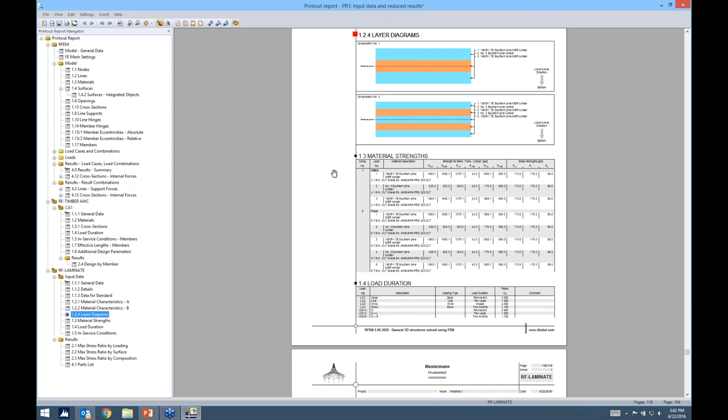You can always add pictures in here. If something were to change in your model, you don't have to worry about reprinting pictures—everything will be updated automatically. So everything's very synchronized within the program.